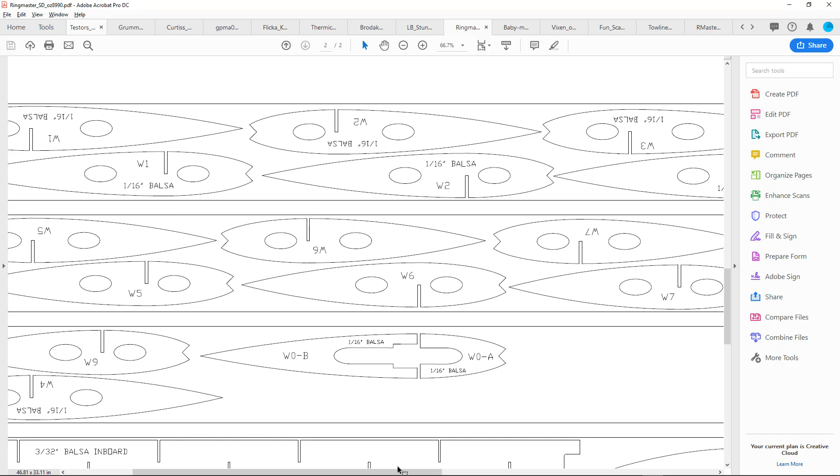So I had downloaded the Ringmaster plan off the internet. This is a modernized version of it, I'm told, within the last 5 years or so - I'd have to check the date on this. But somebody did a nice CAD drawing of this. It'd be nice if I actually had the CAD drawing, come to think of it. What I'm doing is trying to put this into Fusion 360 so I can play around with it.

As we take an edge-on look at the plane, we can see that the root rib, down the center of the wing - not really the root, at the outside part of the profile fuselage - is actually broken into two different pieces because of this pre-established webbing that this design uses, which is kind of neat. I thought I'd give this a try. If I get a fixture set up for the wing jig, I could just modify it for other versions of the Ringmaster. I'm pretty sure this design wouldn't be old-time worthy or eligible if you're entering a contest.

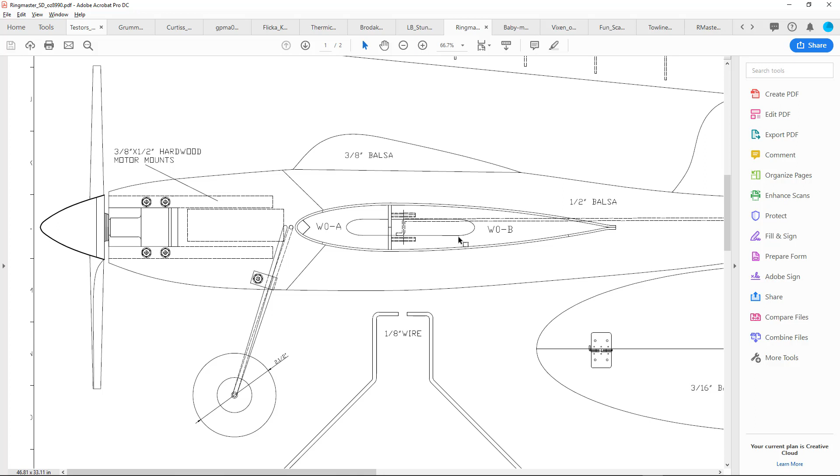Okay, so what I wanted to do was enter this into Fusion 360 so I can make myself a bunch of templates with this in order to cut ribs. Yes, I do have a CNC machine, but I've yet to get it rigged well enough to cut ribs in balsa, which would be pretty easy. But I'm thinking that would honestly take me about a month of free time to get going, and it's easier to just sit here with a bunch of 3D printed outlines for the ribs and cut them myself. So I'd want to go over this.

This is the SVG problem, if you will call it that. I don't want to bash Fusion 360, but I've had problems with SVG. I think it could be done a little bit better - Fusion 360 should let you enter your own scaling factor into the system so it works on your own system. Because what I've read, well, first of all, it's a clunky process. I think there should be better scaling control over it than what happens. So let me show you what happens.

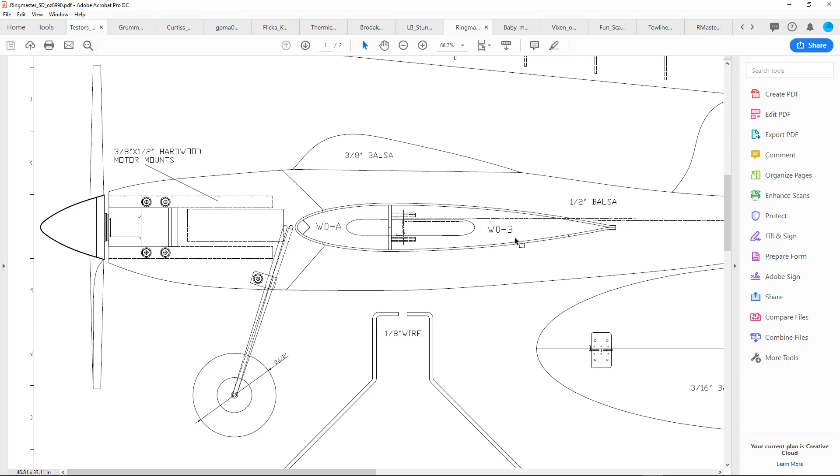Okay, so if you take a look at the edge-on view of this Ringmaster, if we go find the rib for that, it's right here - this is the one right down the center line. There's a split here because, as I said, right above it are shown these wing spars, which are almost like webbing already. And if you notice this design, it alternates high, low, high, low, high, low for the ribs. If you look at the ribs, W2 has a cut on the low, W3 has a cut on the top there. So what I wanted to do is just be able to cut out the W0-A and -Bs as one piece.

All right, so I'm going to bring it over into Photoshop. So I come over to Photoshop - where do I find that? And I brought that in, and then I retraced that just using the pen. Really simple. I mean, I don't use Photoshop much.

It takes me about an hour and a half to get my head back into it again, to be able to get the points here, control them, and get a pretty nice, pretty accurate overlay on it.

So what I had done was I took a section of the PDF here. I selected it - actually I bring the entire file into Photoshop. I don't have it up here right now because I've closed Photoshop since bringing the entire file in. I do a select of the rib that I wanted, which was this image here. Okay, so let me turn off the rib trace.

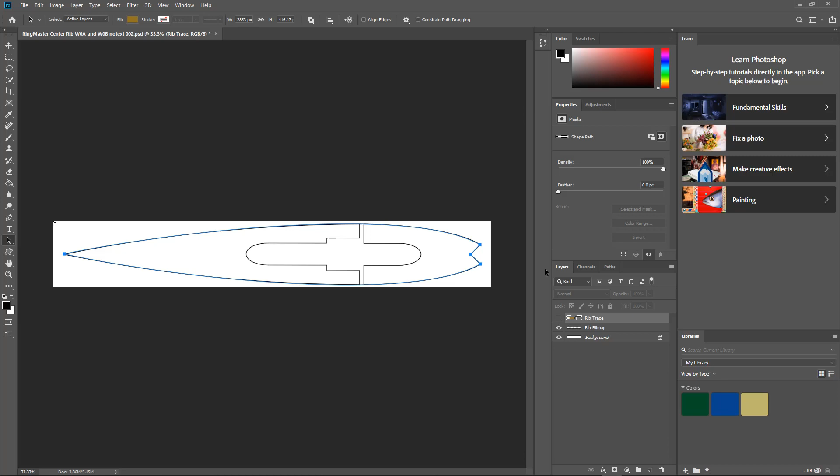Turn that off. I don't know if I can turn off a path on this. All right, maybe if I select outside there.

Okay, that's the actual path that I set up, which is pretty nice. Well, anyway, I'll comment on a couple of things about symmetry there in a minute.

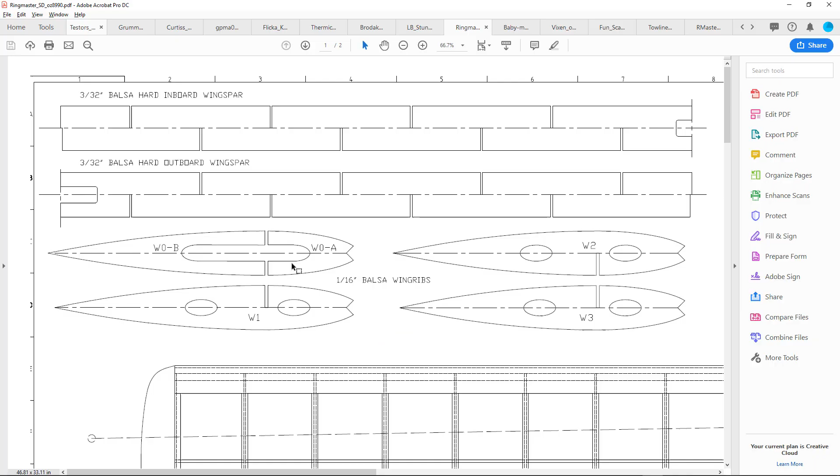So this I had brought in. I doctored it up by removing the text that was over on this. I just removed this - I think I removed, no, the center slot's still there. Okay.

All right, so I had drawn the rib over this. Now I want to get this into SVG so I can move it over to Fusion 360. Okay, which I do - so I've saved that as an SVG.

Come over to Autodesk, or yeah, into Fusion 360 here, and I have inserted it here once, but I'm going to go through a clean startup here.

So just for grins, I'm going to create my own new component here, and we're going to call this the actual center rib, ringmaster. I think it's called SD - the gentleman's initials are SD, I think that is. Just call that the version of the ringmaster.

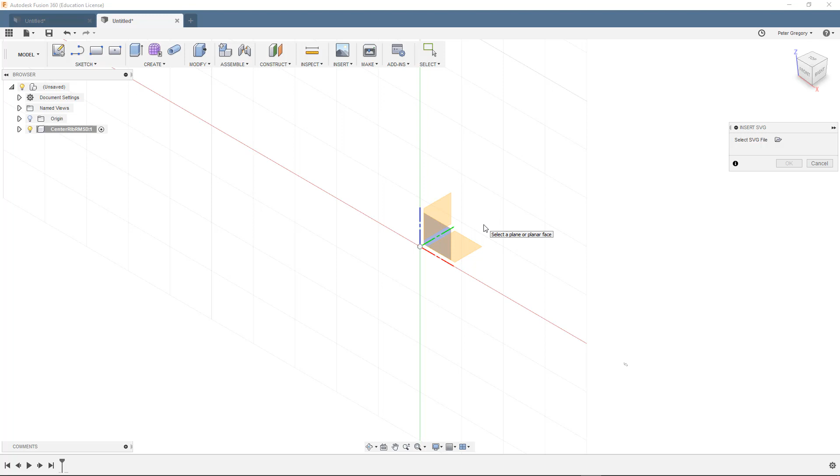Okay, all right, so we name that, and then we want to insert an SVG. And I'll pick up the file first, and that file is the one that is the output from Photoshop, and I'll put it on the XY plane here, okay?

And this is what I'm talking about, that everybody runs into the problem of, okay? So for some reason, the location of this is located in the northwest corner of the file, okay? So the extent of the file, I believe, is homed in on the origin here as the upper left on this thing. So what I'm going to get at is the scale of this thing.

Okay, so how do we get this? If you watch other videos, they do little logos and things that have to fit on certain surfaces, so they can get them to drop in and scale it just for the surface they're going to go in. The issue here is this is the only time I'm able to scale this image, is when I'm bringing it in. All right, so it's kind of kludgy.

It's like an area that needs work in Fusion 360, which is incredible and super and really excellent. But when you go to do these SVGs - I've done another project with this, and now that I'm doing another second sort of significant project, if you will - I just ran into this.

I thought I'd make the video to kind of explain here what I've figured out: I believe that Photoshop is dealing with 96 DPI, and the file, however, is in 300 DPI, and there's some kind of meta information in that Photoshop file, the SVG, when it comes in, all right? And what it ends up doing is it ends up saying inside Fusion 360, it thinks it's 96 DPI when it's actually coming in at 300.

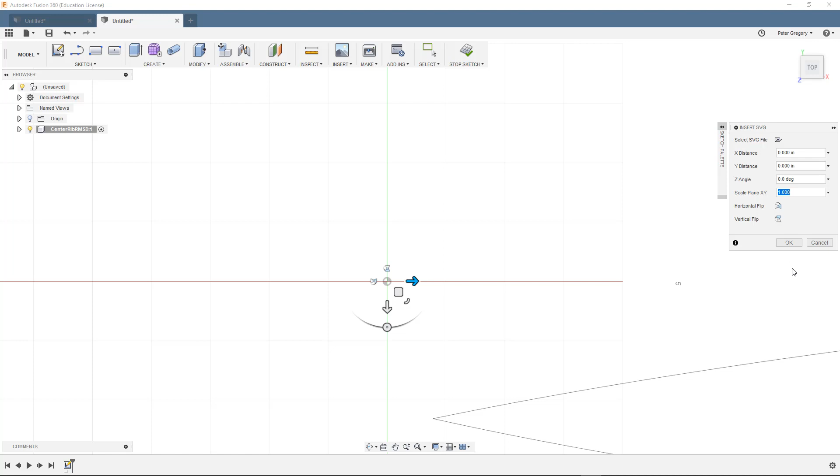Because when I start using those numbers, what happened is that if you scale that - if I need to scale this down, let me just show you what the image looks like. I don't have a mouse running right now. Let me roll out a little bit here.

Okay, I'm going to show you how large this thing comes in. It comes in like 3 times too big, and that struck me that the ratio of 96 to 300 was somehow involved there. And sure enough, what I did was I just divided 96 DPI by 300 DPI, like a screen resolution versus a print resolution. And that comes out to 0.32.

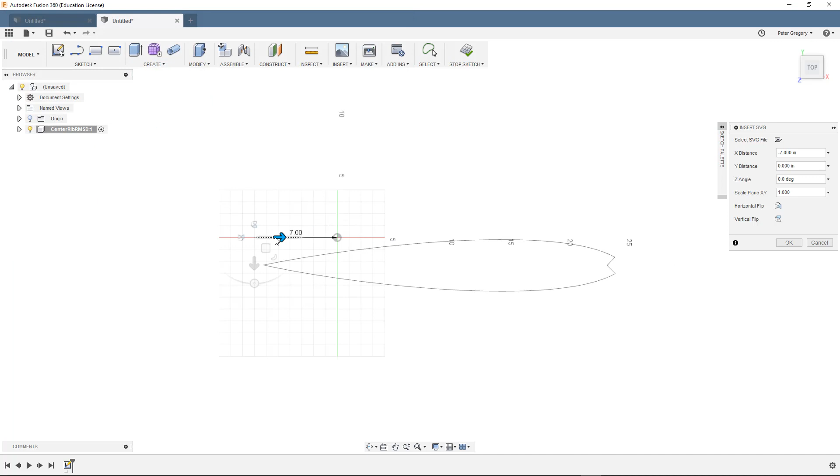Come back up here. If I scale it, for some reason, it is not allowing me to scale it. Let's move it over here. Something's going on, I don't know what happened. Insert it again. You don't get it. Okay, so for some reason it got into a funny place. Actually, you want to scale it first, I found.

Okay, so 96 divided by 300 is about 0.32. And I'm just going to tell you right now, I don't want to drag this out too long, but I actually had to get to 0.319 to get this thing to match up to the original print. And it's still off by 11 thou as far as a distance of approximately 10 inches goes. It's a little bit scaled wrong, but 11 thou over 10 inches is not going to hurt what I'm doing here.

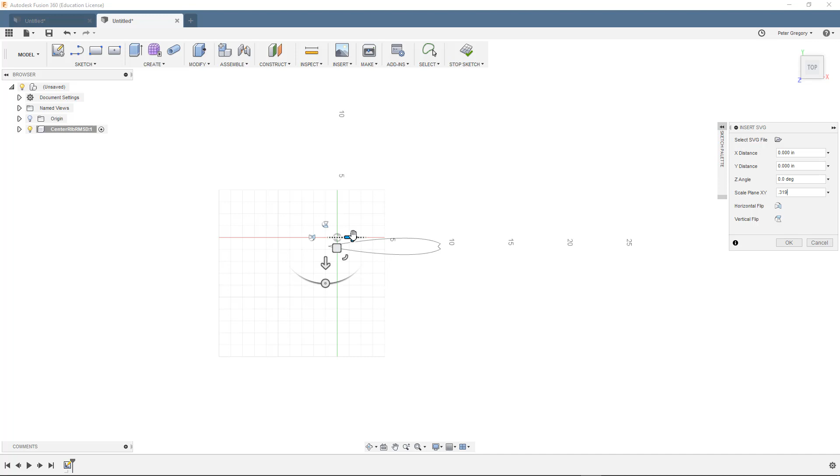So actually, you can see the preview there. And before I hit enter, then I'll move it back here to work with it around the origin, okay? And all I'm going to do is drop that in. And I thought I'd mention that.

I think that's part of the key here, but I do believe Fusion 360 could be better in this realm because so many people bring in their art from Illustrator or from something else as an SVG. And I've seen several videos, and none of them are covering this - some of them just cover, oh yeah, generally if you throw it down on a surface, I'm sure that they practiced the video beforehand and they got a scale that worked for them and they dropped it in, but they didn't talk about the scale.

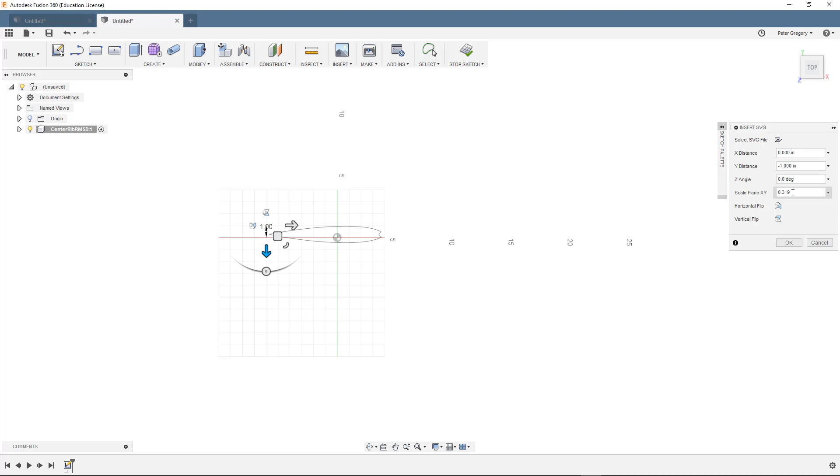I think this is the key, and I even had to tweak it from the actual - it's actually 0.32000 is the ratio. I mean, 0 is all the way out, whereas I had to come down by just 1 thou scale here, 0.319 instead of 0.32 to get it to work for me. When I do that and I hit enter, that looks good.

Let's take a look at how big that is. I'll show you the dimension. Let's do an inspect on this. Can I fit it? Yeah, I think we can get it in here, right? And we'll do an I for inspect. I'm going to check from edge of the very end of the trail.

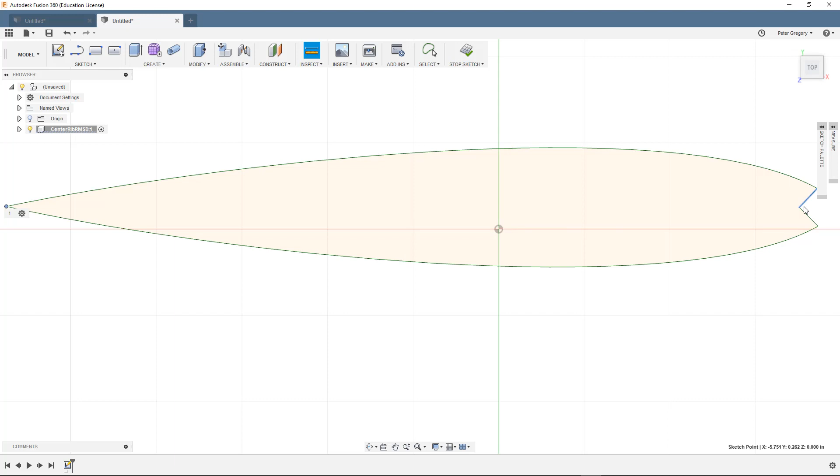Oh, how do I get rid of this guy? Get him out of the way for a sec. And I'm just going to measure. This is the point that I measured to. And here we get...

9.261, which is 24 thou off. I'm sorry, it was 9.25 is the actual dimension on the original drawings - 9.25 when I printed that out, which I'm happy with. This has 11 thou error. That's the 11 thou I talked about before. It's just a smidge longer here, a little bit bigger.

And you can play around with the numbers if it matters to you. But if you're trying to make a mechanical part by starting with Illustrator, you're not going to get a specific dimension. But when you try to do something like I'm doing and take just a drawing from PDF all the way through to SVG into Fusion 360, this is what you're going to have to deal with.

And I hope if anybody else has a better way to do this, or if there's a track on some kind of lead on a fix for Fusion 360 or some other methodology. But I've watched a bunch of videos. I've done this and actually printed some nice things playing around with the scale. But in this case, I have to have this thing pretty accurate to actually come out the right size. Hope that helps.